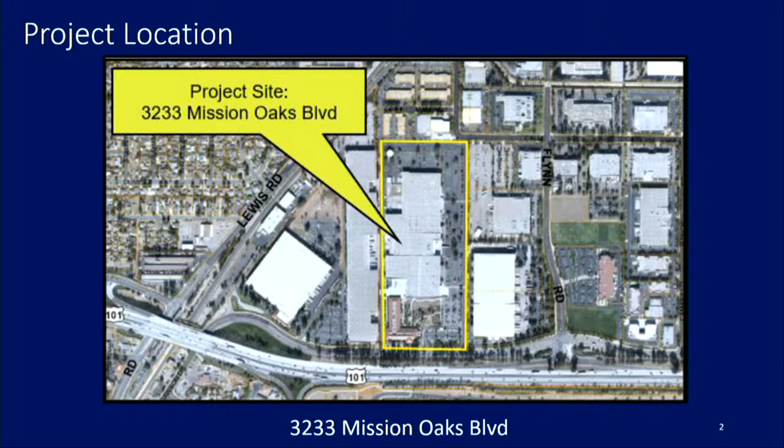This project is located at 3233 Mission Oaks Boulevard, as shown on the map here. It is approximately a 39-acre site, in the Flynn industrial area, and it is zoned M1 and is an industrial use in the general plan.

The applicant is requesting to demolish an existing 52,500 square foot office building on the southern portion of the project site, known to many in Camarillo as the Technicolor building. That building would be demolished, and in its place would be constructed a new 117,000 square foot multi-tenant industrial building, referred to in the plans as Building A.

And then on the back of the lot on the north side, attached to the existing industrial building that's there, would be an addition of 55,766 square feet, which is Building B.

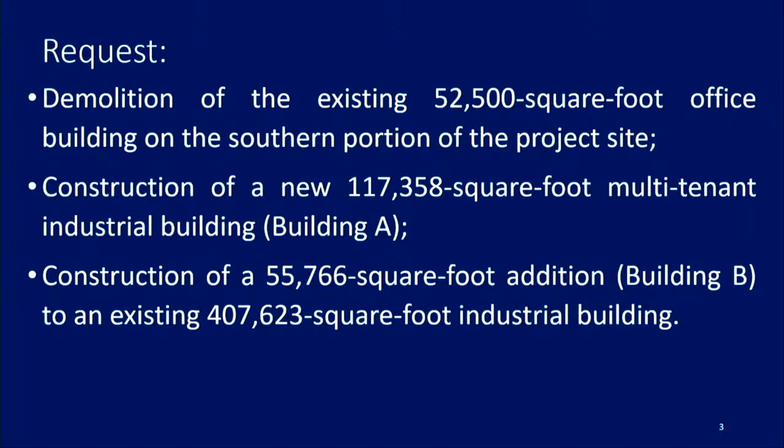On October 16th, 1979, the Planning Commission approved IPD 53 for the construction of the approximately 569,000 square foot building at that site. Since then, there have been 10 approved modifications made to the site, including tenant improvements, trash enclosures, reduction of building size at times, and additions depending on tenant needs. The current request is for the 11th modification to this site.

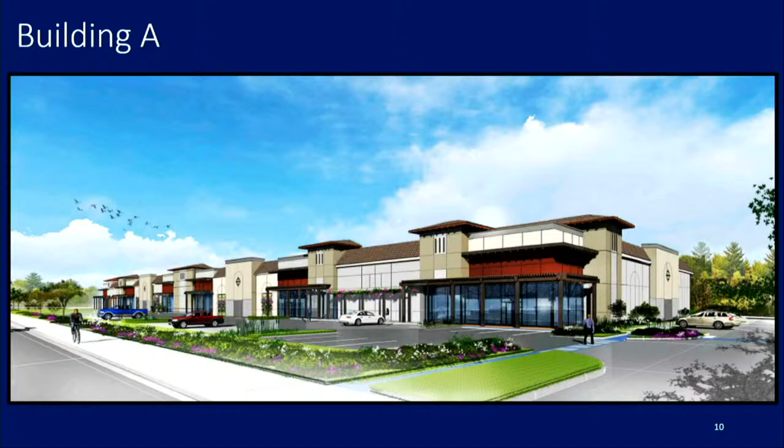This building is divided into 6 tenant spaces. The end cap spaces are approximately 21,000 square feet, and the 4 interior spaces are about 19,000 square feet. They already have their office, which is what you see from the road in that rendering I just showed. The loading spaces are all in the back, and each tenant has 3 loading spaces: 2 exterior and 1 interior.

This building is set back 116 feet from Mission Oaks Boulevard because they're providing a nice landscaping buffer that will support the trees along there. They're putting 2 rows of parking so the parking doesn't interfere with the loading in the back, keeping it safe for personal vehicles to stay out of the way of trucks. There's also more landscaping against the building, and the building is then set back 116 feet from Mission Oaks Boulevard.

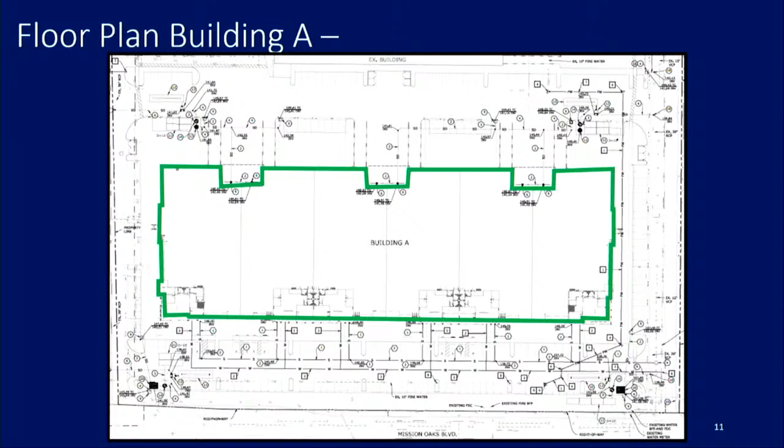There will be public art on the facade of the building along Mission Oaks Boulevard. This is a preliminary conceptual idea, but condition number 189 states that this public art will come back to the Planning Commission when the final product is done, so the Commission can approve it. It'll be central to the building along Mission Oaks Boulevard, so it'll be a nice view from the street as you're driving down.

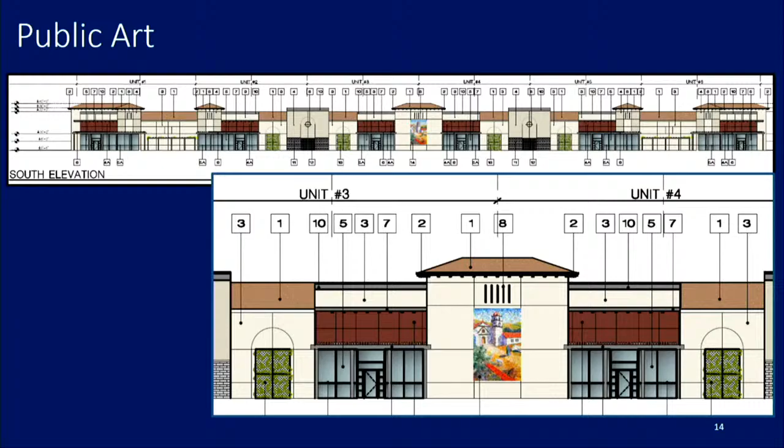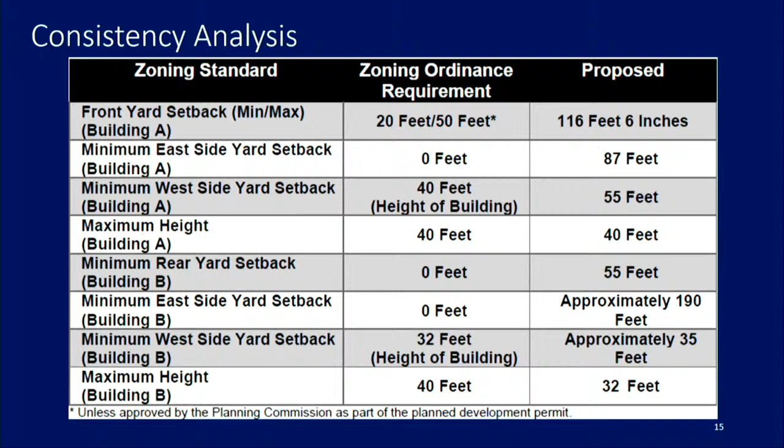Consistency analysis: this property, as designed, meets all setback requirements for the zone except the front yard setback. As mentioned earlier, the setback is 116 feet 6 inches. The code says 20 to 50 feet, a minimum of 20 and maximum of 50. But the code also allows the Planning Commission to approve an increased setback as part of a planned development. They're asking for that setback to keep passenger vehicles separate from loading vehicles, and to provide the landscaping buffer along Mission Oaks Boulevard.

The parking: they are designing this project so half will end up being manufacturing and half will be warehousing. The parking ratio for manufacturing is 1 to 500. If the office space is less than 20% of the total space, it's also counted at 1 to 500. So they will require 104 parking spaces for the building.

The manufacturing requires 524 spaces, and the warehousing, at 1 to 1,000, requires 267 spaces. So the total parking required is 895 spaces. But back in the 80s, IPD 53M4 was approved for a 10% reduction as allowed under the code, which the director can grant. That reduction was applied with IPD 53M4, so the actual parking required is 805 spaces. They're providing 835 spaces, so there's a surplus of 30 spaces.

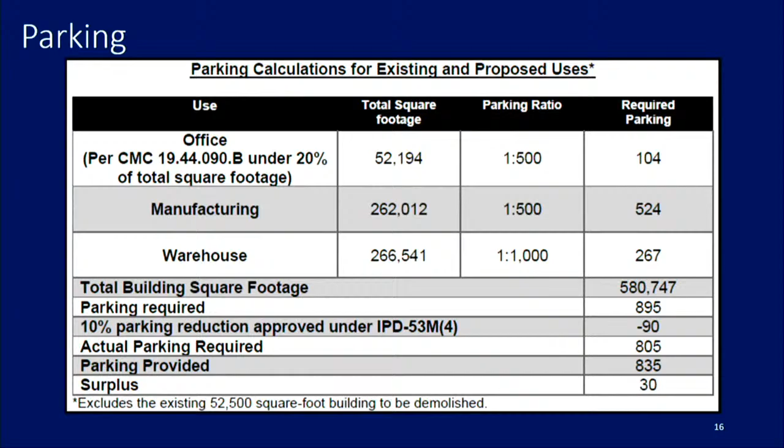The city contracted with Rincon Consultants to prepare an initial study for the project as required under the California Environmental Quality Act. The initial study determined that a mitigated negative declaration needed to be prepared, and that was made available for circulation and public review and comment from June 30th to July 20th of 2020.

We had no comments that came in from the notice of intent and the hearing that we had for the notice of intent on this MND. Since that time, we have had one additional comment when we posted for this hearing, and that was related to traffic. It was more of a development comment, not an environmental comment.

The initial study for this project did identify three potentially significant effects on the environment: air quality, just due to the construction activity that would be going on, the trucks and things like that; biological resources for nesting birds that could possibly be on the site, either on the trees or on the walls of the building; and hazards and hazardous materials from potential soil contamination, because there is an old railroad spur on site.

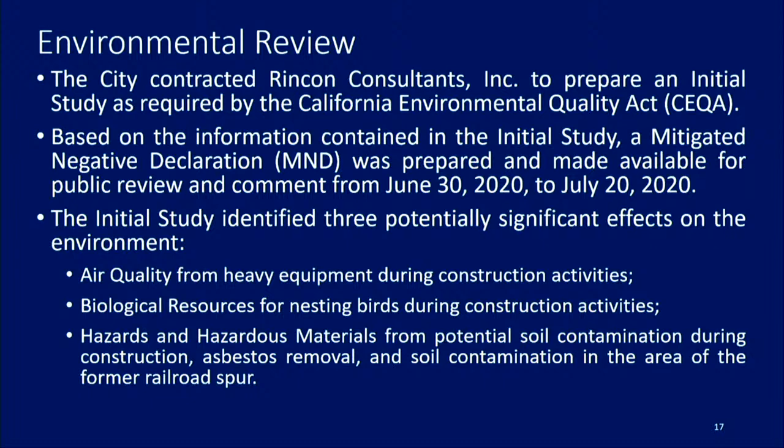Air quality requires that the construction equipment meet EPA standards, that they maintain their vehicles and keep logs of that maintenance, and that they never have any of their equipment idling for more than 5 minutes.

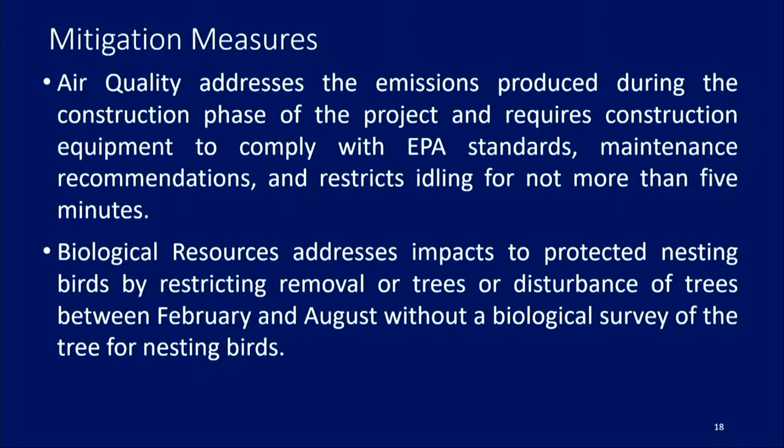The biological resources mitigation addresses the impact for nesting birds, so if they are going to start any work between February and August, they would have to hire a surveyor to do a tree nesting and site nesting study. And if it's determined that there are any birds on site, they're going to have to delay the project until August, when the birds have left the property.

For the hazards, the soil contamination—any soil contamination that's found through soil samples will end up being excavated and removed to a facility to deal with those kinds of contaminated soils.

Prior to demolition of the building, they're going to have to get an environmental consultant in there to determine if there is asbestos or any other toxic materials in the building and remediate that prior to being allowed to demolish the building. And again, regarding the railroad spur, if there's any activity in the railroad spur area...

They will have to do soil samples and make sure that there is no contamination. And if contamination is found, that material will have to be removed from site and then backfilled, with the contaminated soil taken off-site to an appropriate facility.

So approving the MND—the CEQA guidelines require that the MND be adopted by a decision-making body if there is no substantial evidence, in light of the whole record, that the proposed project may have a significant adverse effect on the environment. This MND did contain potentially significant impacts, but they will be mitigated to less than significant levels.

By the mitigation measures and their implementation, which are all included as conditions of approval of the project. So based on this information, and in light of the whole record, there is no substantial evidence that the proposed project is going to have a significant effect on the environment.

So staff is recommending that you adopt a resolution approving the mitigated negative declaration 2020-8 and the recommended mitigation measures and conditions of approval, and adopt a resolution approving IPD 5311 subject to the recommended conditions of approval.

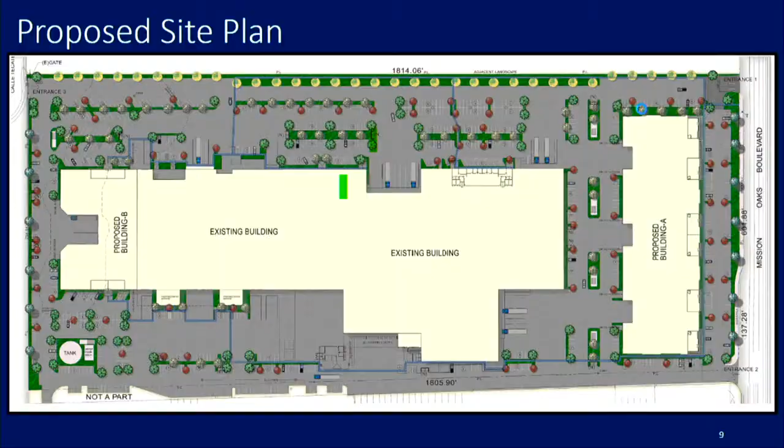So the west side is basically going to look exactly like this. It's going to be a mirror image. So this is the existing building here, and then the facade is going to come out. The patio areas I believe you're talking about are over here, but on the west side, it almost looks like it's inset from the corner of the building in the back, on the west side.

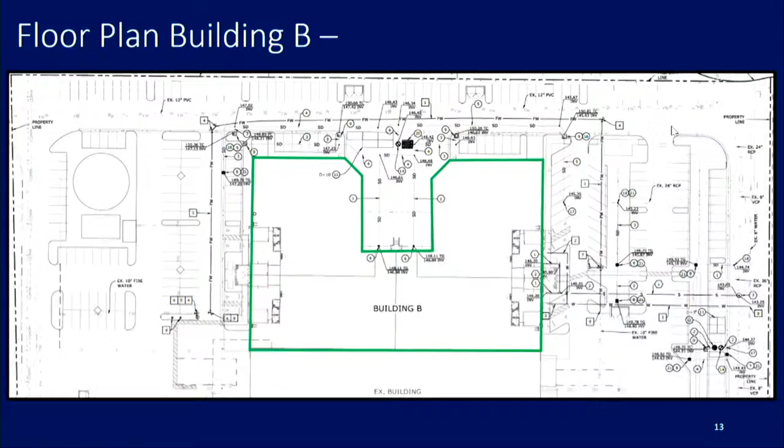So maybe that's an empty loading dock area that I'm looking at on the end of it, on the northeast end. Yeah, and so there are some things along here that are going to end up having to go away because the building will be there. Okay, now I think it makes sense. Thank you. You're welcome.

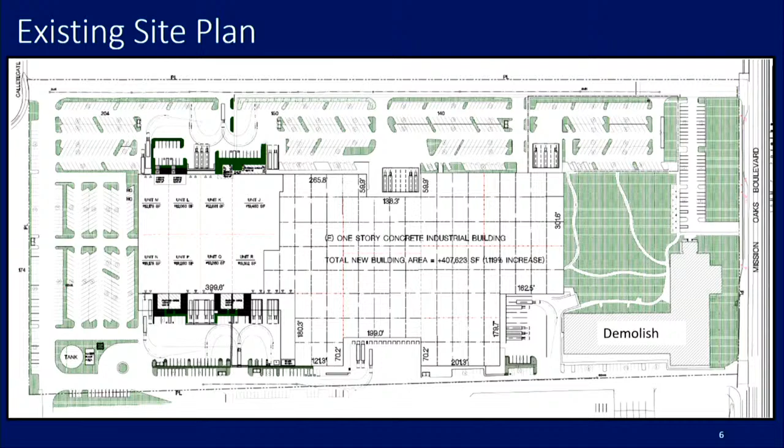Water tanks. One of the directions said something about utility lines to the lot, which is probably just one of our generic directions that we give. So are there currently enough utility lines on the lot to be branched out from, or are they going to have to bring more utility lines, water lines, electric lines in for Building B and where Building A is?

There's probably going to have to be some larger lines brought in, but they're all underground. I think the developer is going to be able to answer that question a little better than I will. Okay, I think that's currently all I have to ask. Thank you. Okay, thank you, Vice Chair.

All right, a couple of things I wanted to ask related to the mitigated negative declaration. Very thorough and exhaustive report, very well done I thought. There was a lot of detail regarding the items that were flagged for bringing below the level of significance. Primarily, there was an interesting history with the soil contamination, and that dates back almost 20 years, it sounds like.